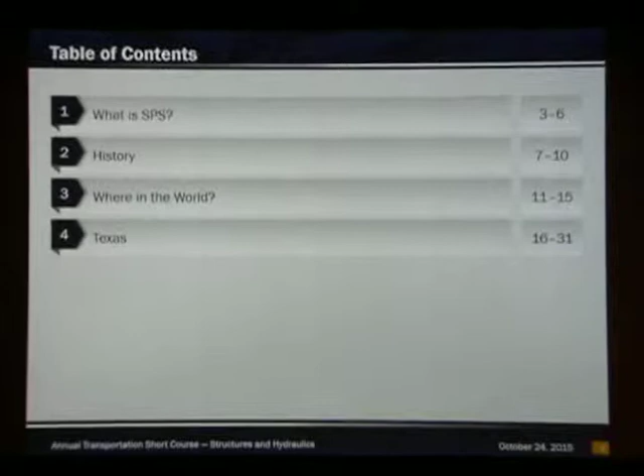I'll be presenting on the SPS deck system for truss rehabs. You might ask yourself, what is SPS? Well, that is one thing I'm going to answer. What's its history? Where did it come from? Why is it here? Where in the world has it been used? It's been used extensively. And how are we going to use it here in Texas?

First of all, sandwich plate system. It's a sandwich: two steel plates with a polyurethane core. The polyurethane core is basically just to keep the two plates separate. It's a pseudo I-shape, if you will, which acts like an I-shape in flexure.

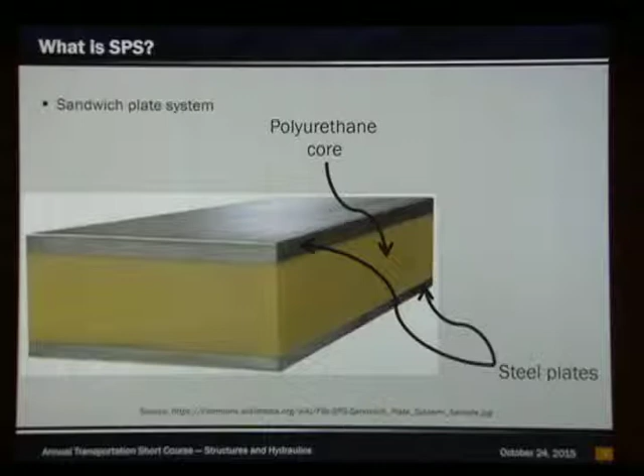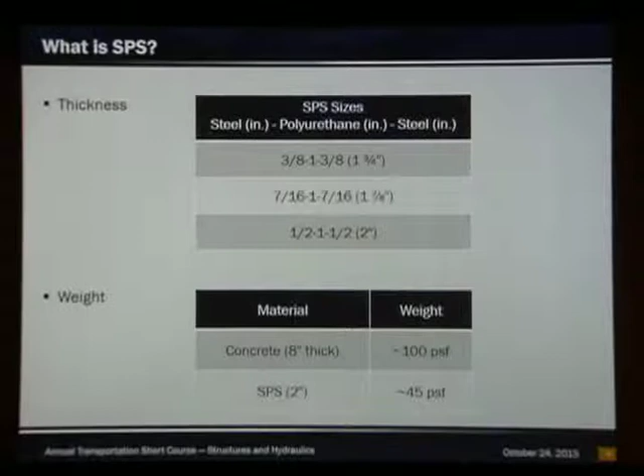It's hermetically sealed, so the core is never exposed to the environment once it's injected between the plates. There's some common thicknesses for bridges, anywhere from 1 3/4 inches to 2 inches. Usually the weight for an 8-inch thick concrete deck is about 100 psf, and SPS at 2 inches is about 45 psf, which is basically over half the weight.

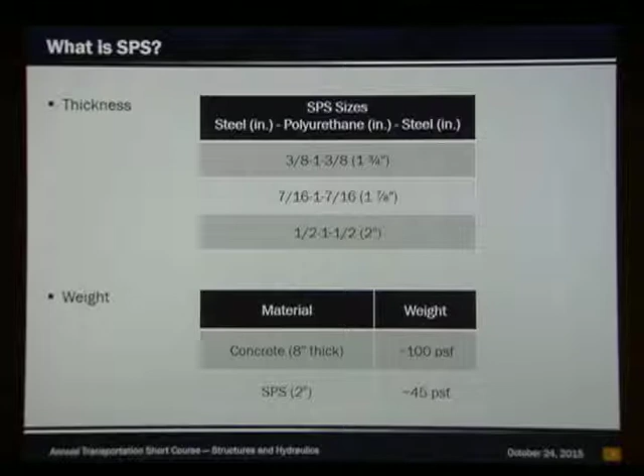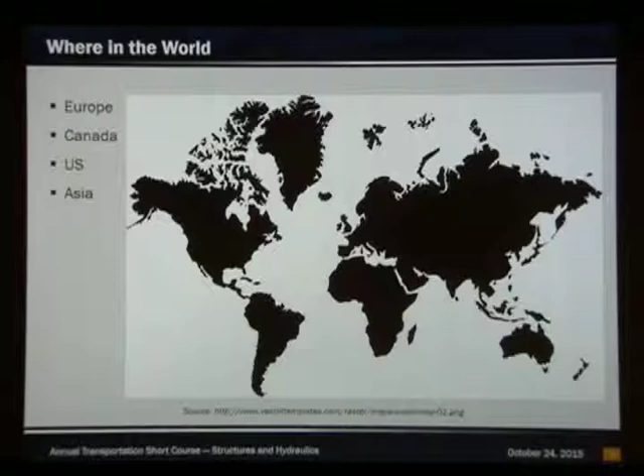As you can see, it's been used extensively pretty much all over the world: Europe, Canada, US, and Asia. It started off in naval applications. When the hull or deck of a ship got damaged to the point where they needed to fix or replace it, they would lay a new sheet of steel over top with spacers, then inject polyurethane into it, which cut down on the weight and meant they didn't have to cut out the old deck.

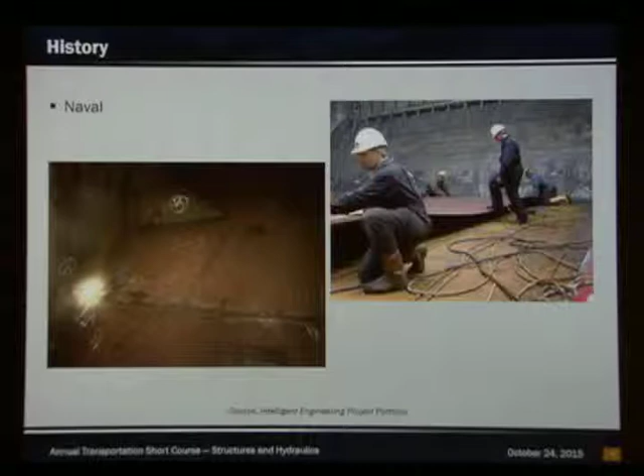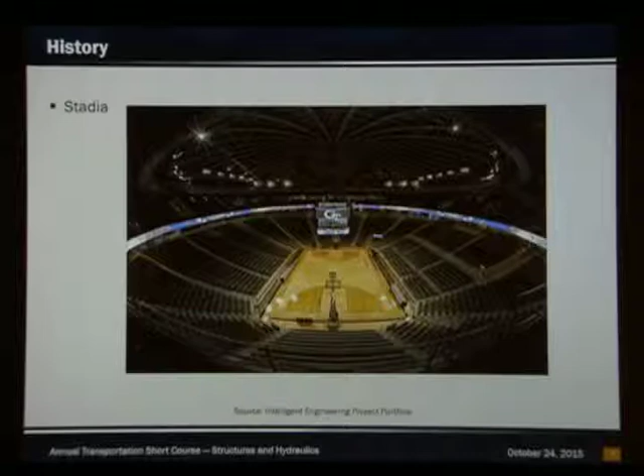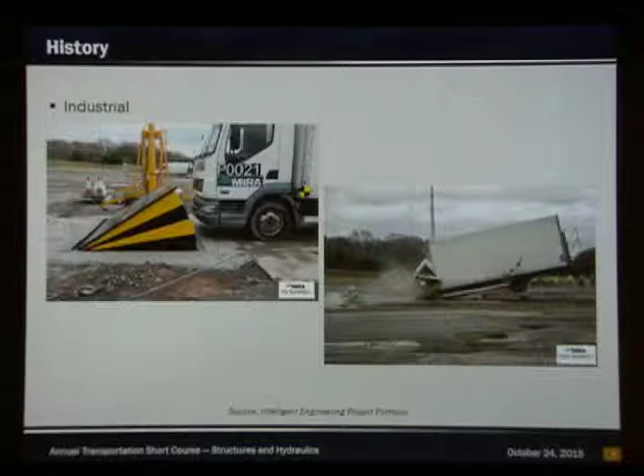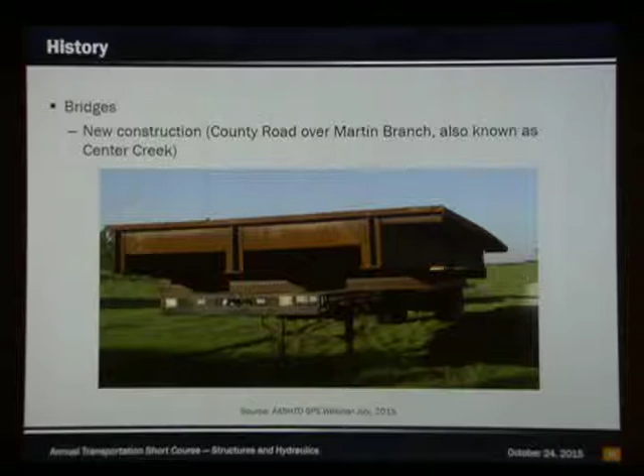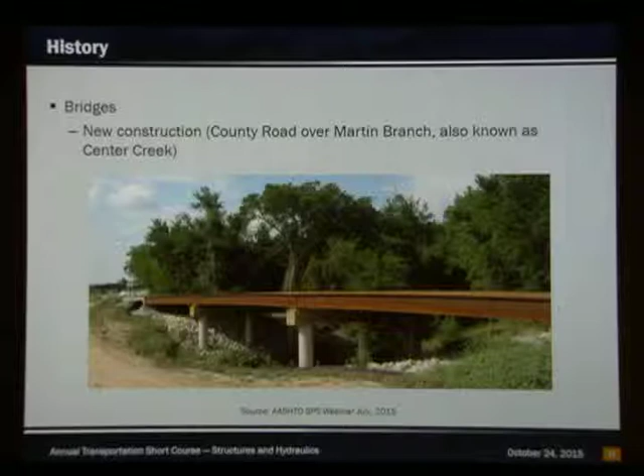Now, bridges, what we're interested in: new construction. This was actually Martin Branch, or Center Creek, however you want to call it. Basically, it was prefabricated, brought on site, and assembled, and then placed. That's almost the finished product, but as you can see, pretty lightweight. Didn't need a big crane. Set it and go - it was pretty quick.

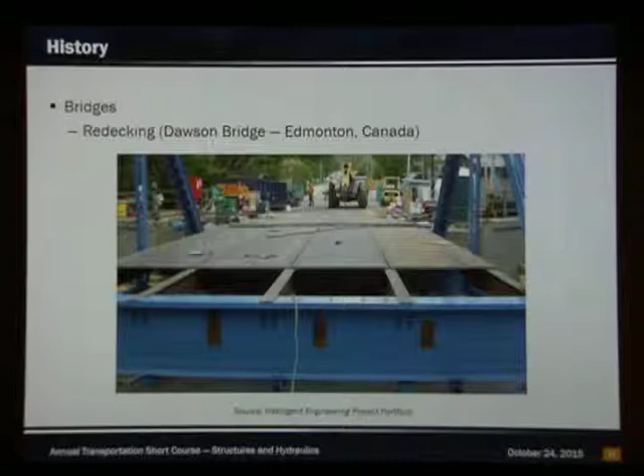What we're really interested in is redecking of truss structures. This is Dawson Bridge in Edmonton, Canada. This is used extensively in Canada on their trusses. This is the finished product - those are connection plates, if you will, to connect the plates to each other. In this case, they use asphalt as their riding surface, the finished riding surface.

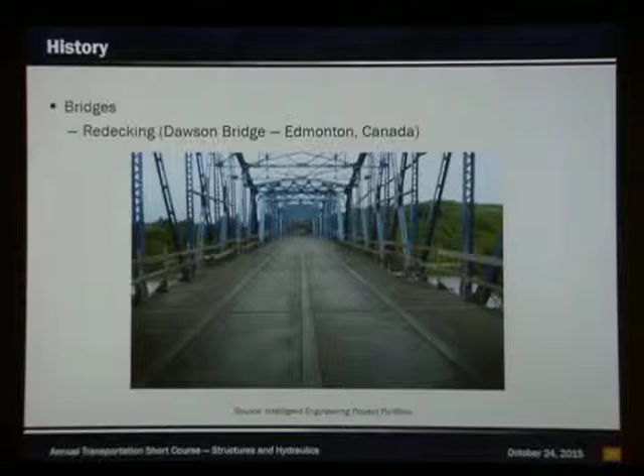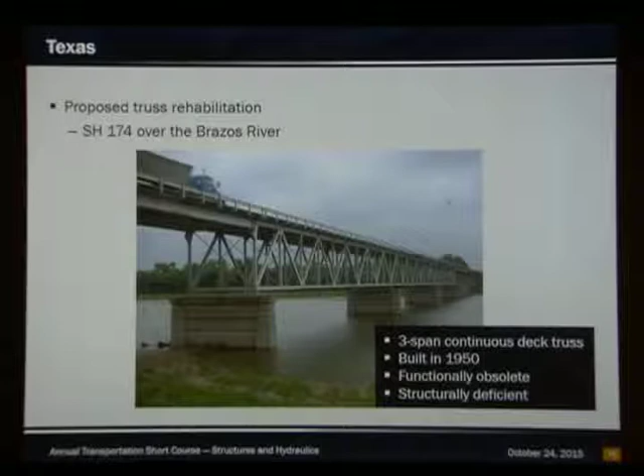This is probably the first bridge in Texas - yes, Tom, I see you smiling. This is SH 174 over the Brazos River, actually over the headwaters of Lake Whitney. It's a 3-span continuous deck truss built in 1950. It's functionally obsolete and structurally deficient.

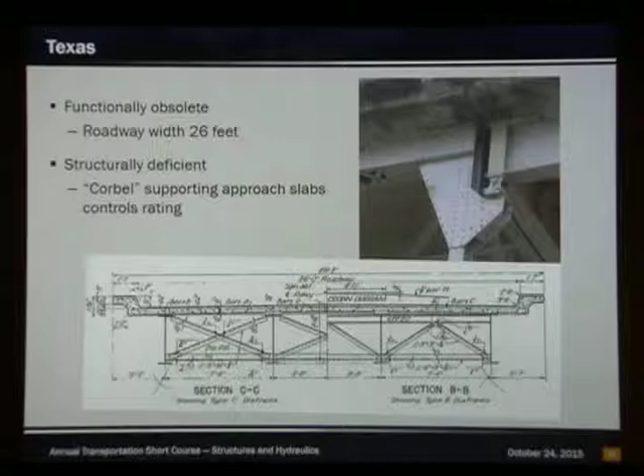Why is it functionally obsolete? Well, it's only a 26-foot roadway. Doesn't meet FHWA standards right now, which is 2 lanes, 2 12-foot lanes, and 2 1-foot shoulders. It is structurally deficient due to the corbel there, which supports the approach slabs. And the current deck is 6 3/4 inches or 6 1/4 inches.

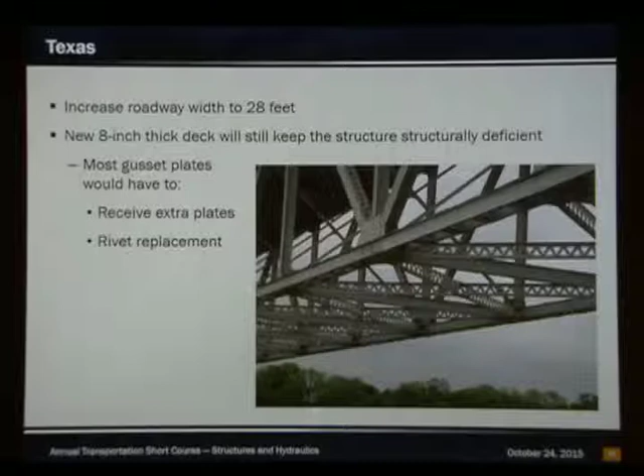Well, to make it not functionally obsolete, we have to increase the roadway to 28 feet. And per standards right now, we also need an 8-inch deck. Well, the 8-inch deck created a lot of issues with the gusset plates. Almost every single gusset plate would need additional supplementary gusset plates, and almost every gusset plate would have to have the rivets replaced with high-strength bolts.

Well, if we reduce the deck dead load by 50%, what happens? Well, now we eliminate the need to do any kind of supplemental gusset plates, and we substantially decrease the amount of rivets that need to be replaced with high-strength bolts.

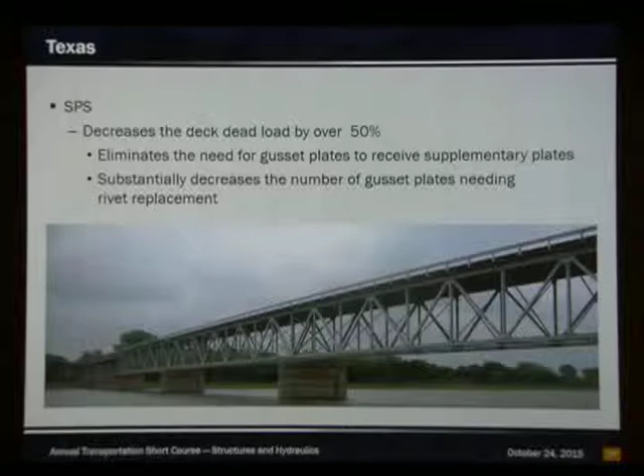And here's basically a typical cross-section. This is going to be a phased project. That'll actually be the crown point, as well as a connection between phase 1 and phase 2. As you can see, there's the center line of road, and there's a 1 foot difference. We can do that, and that actually ended up being cheaper. Originally we wanted the crown point right at the center line, but they said no, we can do it cheaper this way, and we said okay, we can accommodate that.

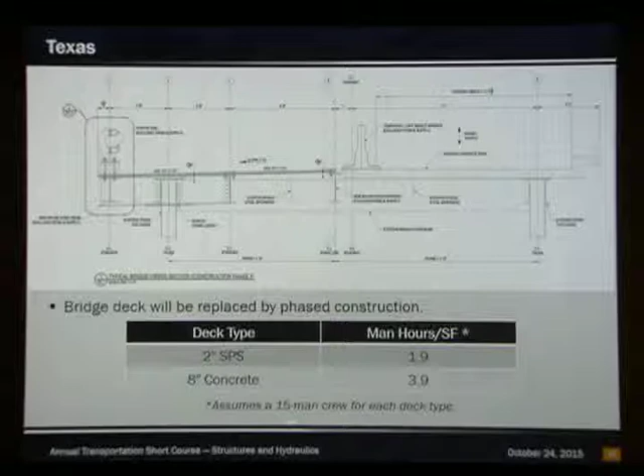As you can see, it's actually quicker too. A 2-inch SPS deck is 1.9 man-hours per square foot, compared to an 8-inch deck, which would take 3.9 man-hours per square foot. That's a pretty substantial decrease in time.

Panel connections: since we're not going to do an asphalt overlay, we're not doing this connection plate. We actually countersink the bolts into the SPS down into and attach it to the stringer. That way, and we come back - which I'll discuss here in a little bit - the riding surface will be an epoxy system, an epoxy aggregate system.

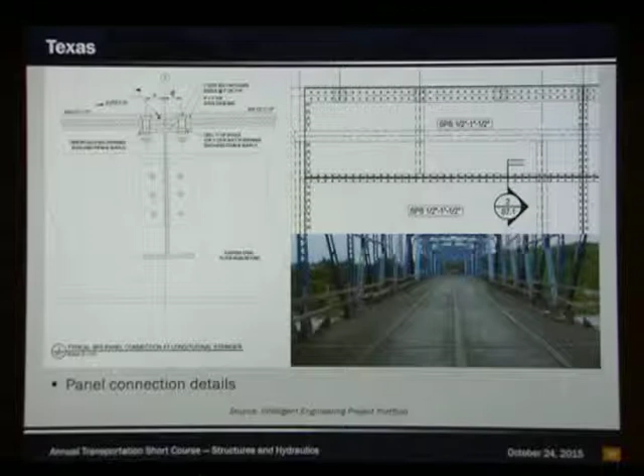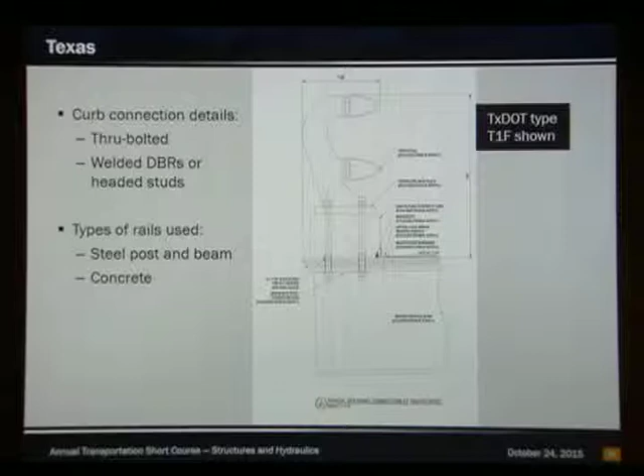They can accommodate the rails, any type of rail we want to put on there. In this case, this bridge is using the T1F, which is a fairly light, non-sacrificial rail.

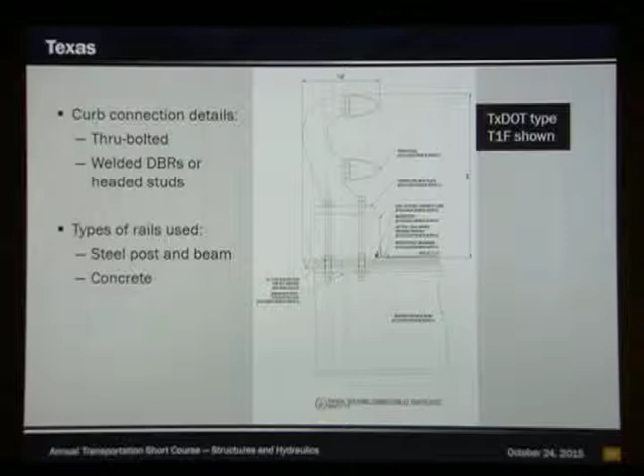Expansion joints: we can pretty much accommodate any expansion joint we have in our inventory with little to no modification.

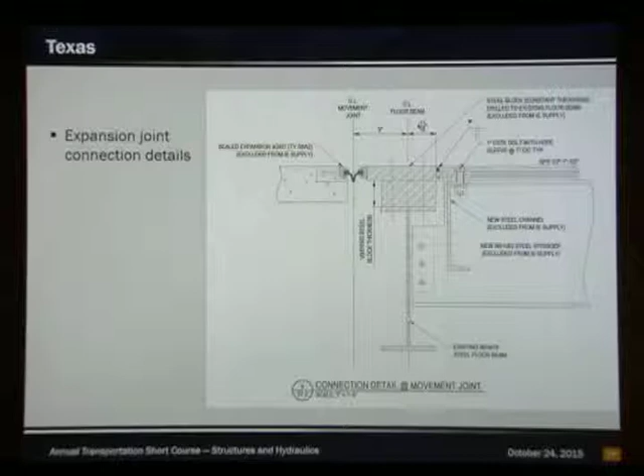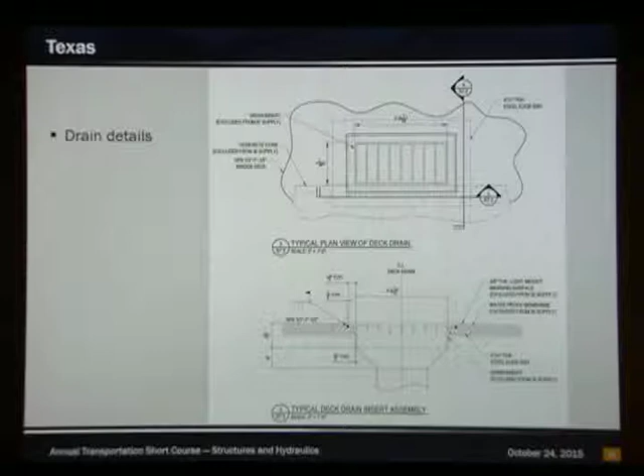Drains. We can still cut drains into it, and we don't have to do much modification to the rails to accommodate these drains. Now here's what probably a lot of you are concerned about: the wearing surface. It's basically already in our standards as a multi-layer polymer overlay, TxDOT specification 439, bridge deck overlays. It's an epoxy with an aggregate overlay, generally about 3/8 of an inch thick.

A replacement cycle is about 5 to 10 years. I don't know how that correlates to asphalt, if somebody would enlighten me, that would be great. That also depends on the product and ease of application, and that's also based off of Texas climate, which is pretty detrimental to a lot of things that are chemically based.

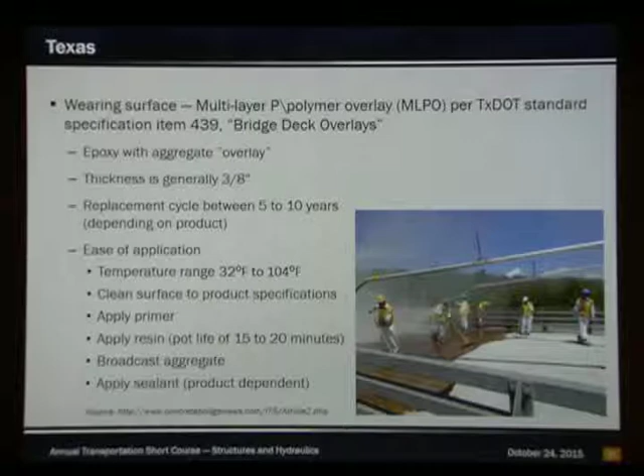Ease of application: you actually have a fairly large temperature range in which you can apply the epoxy and the aggregate, 32 to 104 degrees Fahrenheit. Clean surface, of course, according to the specifications of the product. You need to apply a primer, then apply a resin with a pot life of 15 to 20 minutes, and then you broadcast your aggregate and apply your sealant.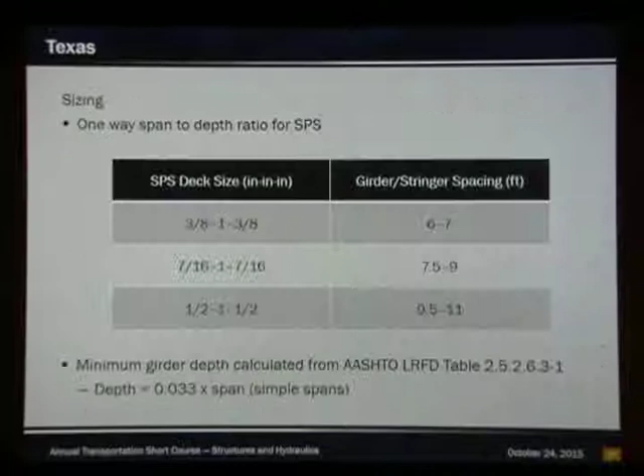This is your panel thickness to depth ratio to span length. If your stringers are, say, 3/8-1-3/8, 6-7 feet between girders and stringers, and so on and so forth, based off the AASHTO LRFD table 2.5.2.6.3-1.

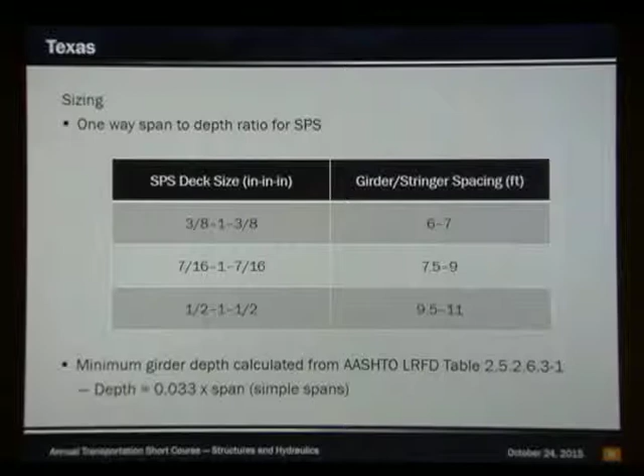Grading, we just do it off the stringers. We're actually not going to use the existing stringers, we're going to replace them with new stringers, and then those stringers will be adjusted to give the deck the proper elevation.

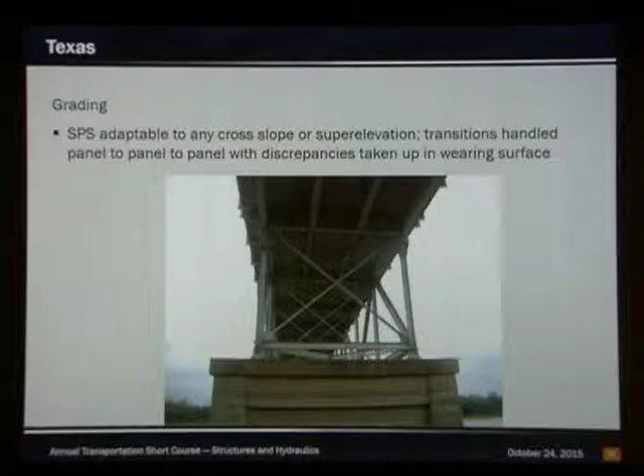Distributors, you might be asking, how available is this in the U.S.? There's one distributor right now in the U.S., located in Ohio, but hopefully the proprietary Intelligent Engineering, which owns and developed this product, says they should have another one by the end of this year and possibly another one after that sometime mid-next year.

Due to costs, we're not recommending this for off-system bridges, definitely on-system and definitely high or a lot of traffic. We'll use it as an alternative, letting the contractor make that determination. Luckily, the benefit to it is no gusset plate strengthening, hopefully, or replacement, and very little to no rivet bolt replacement. It'll actually shorten the construction sequence, and if the availability of ready mix is not that great, this would be a good alternative. Any questions?

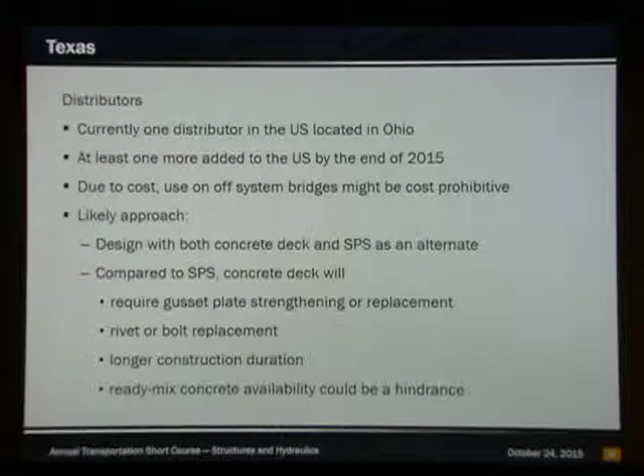Yeah, at the perimeter of the plate, and also where you cut holes in it, it looked like there was a 4-inch wide by 1-inch thick bar. Is that installed in the field, or does that have to be done in the shop before they inject the polymer?

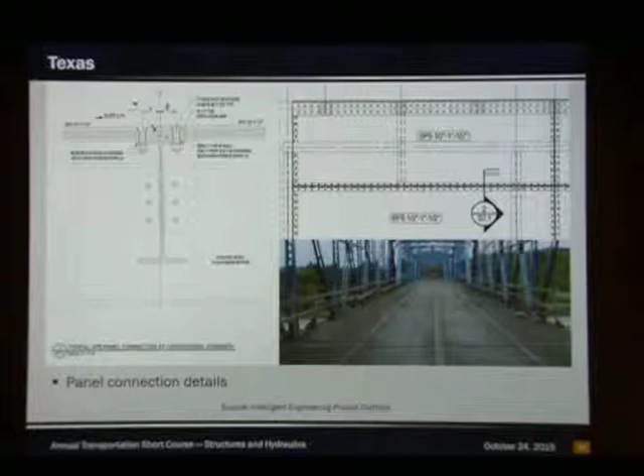Go back to it so everybody can see it. There's a section there. Now that bar, he's asking about this bar right here, this steel piece. It's installed in the shop. Everything's done in the shop. The only thing that's not done in the shop would be, of course, the connection to the stringer.

So even the drain holes have to be shop fabricated? Yep, even the drain holes. Everything's done in shop because it has to be, that polyurethane has to be injected, and as soon as it's injected, it's totally sealed. So that's how they're doing that.

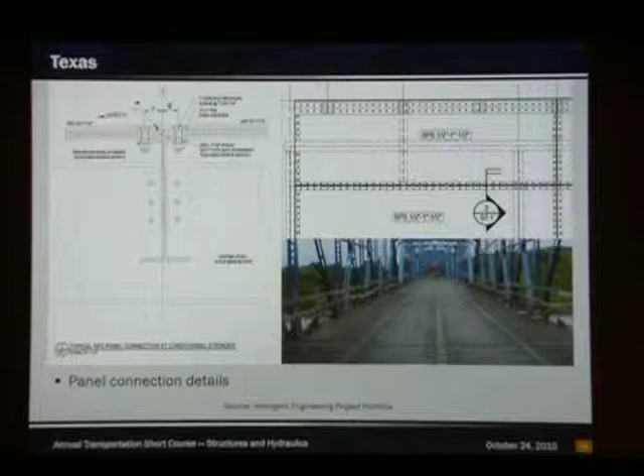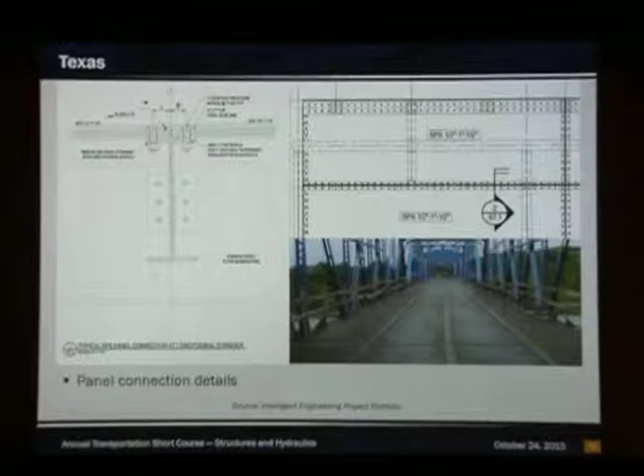Correct, everything that you can possibly do in the shop is done in the shop. I'm sure they can make adjustments as needed. She was asking about the rail, if the rail attachments are done in the shop or in the field. It looks like your field welding is only in that area where the polymer's away. Right, and I actually asked the developers, Intelligent Engineering, about that too.

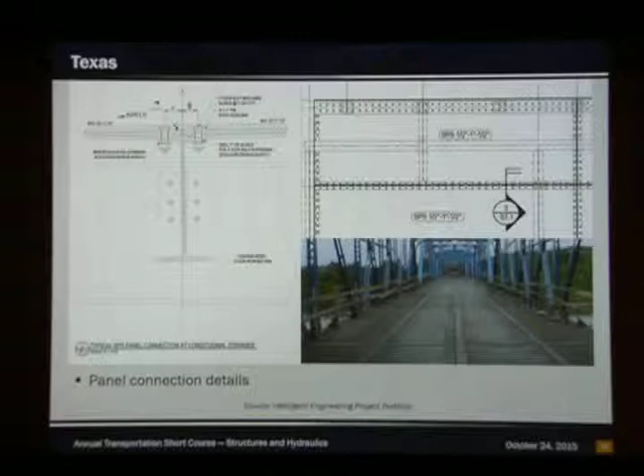Yes, but we had to talk about the fire rating, because I was like, it's a polyurethane core, that polyurethane core starts getting hot, it's going to melt, it's going to degrade. And they said, since it's hermetically sealed and not exposed to the environment, it will actually just re-solidify, with little to no chemical change, and you won't destroy the bond between the two plates after it's set and solidified.

Any good questions? Has any testing been done to that theory? Not that I know of. I've asked them, but they said no. That was a good question. That's something that's been brought up, the fire rating, and they don't seem to have an issue with it. But fire is on top—unless it's something below, the fire shouldn't really affect it that much because the heat's going to rise. But if it was something below, that's a different story.